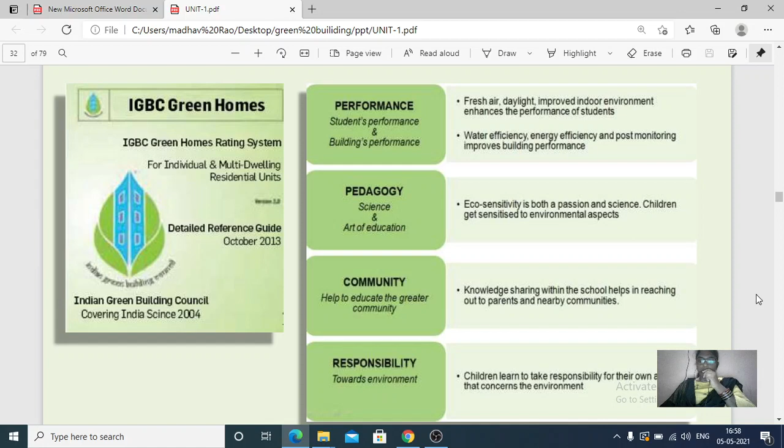Under responsibility, the children learn to take responsibility for their own actions that concern the environment.

Next one is TERI. I told you just now that under TERI you will be getting the Griha certification. Griha certification's full form is Green Rating for Integrated Habitat Assessment.

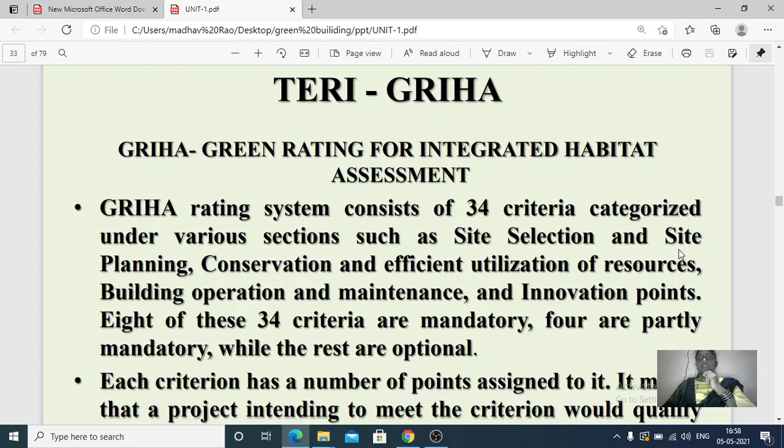Griha rating system consists of 34 criteria categorized under various sections such as site selection and site planning, conservation and efficient utilization of resources, building operation and maintenance, and innovation points. 8 of these 34 criteria are mandatory, 4 are partly mandatory, while the rest are optional.

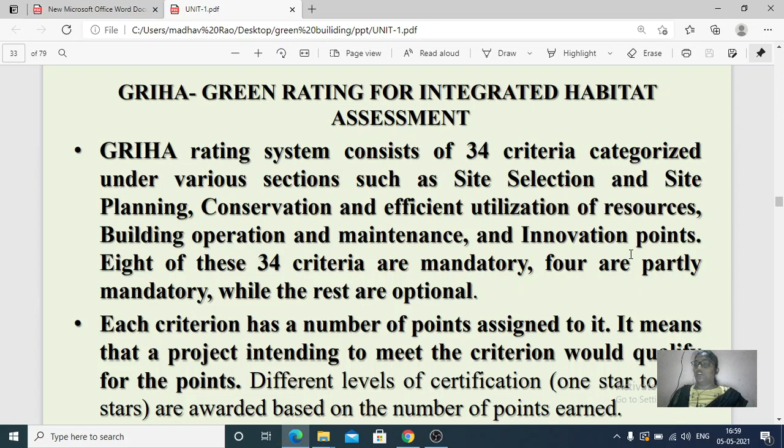When we are constructing a conventional building, we follow codes like IS 456. When we go for steel construction, we follow IS 800:2000, IS 800:2007. Similarly, for constructing green buildings we have to follow certification courses like IGBC conditions.

Under that you will be having certification courses like Griha certification, which has 34 criteria. The main 8 criteria are mandatory and should be followed whenever you are going for constructing a green building.

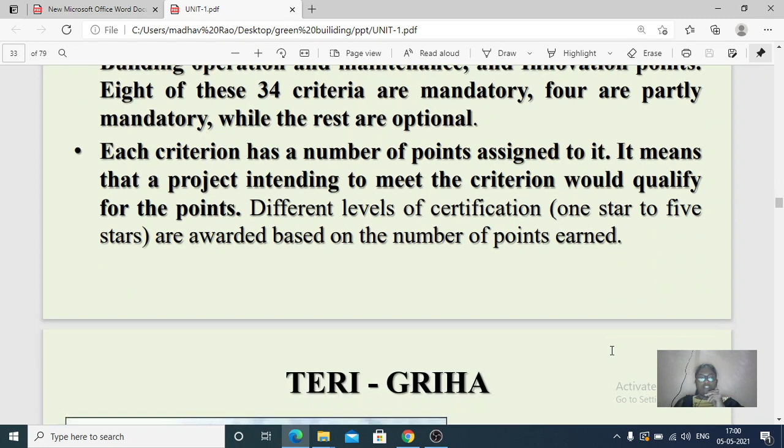Each criteria has a number of points assigned to it. It means that a project intending to meet the criteria would qualify for the points. The different levels of certification, 1 star to 5 stars, are awarded based on the number of points earned.

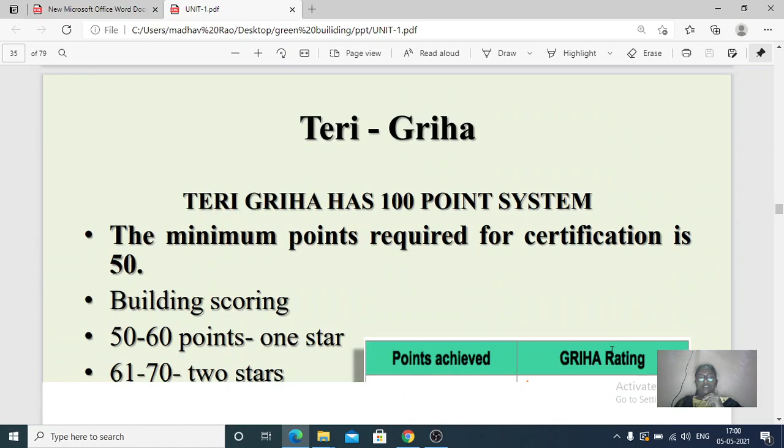The Green Rating for Integrated Habitat Assessment, Griha, is the national rating system for green buildings. TERI has a 100-point system, and the minimum points required for certification is 50, based on the building score.

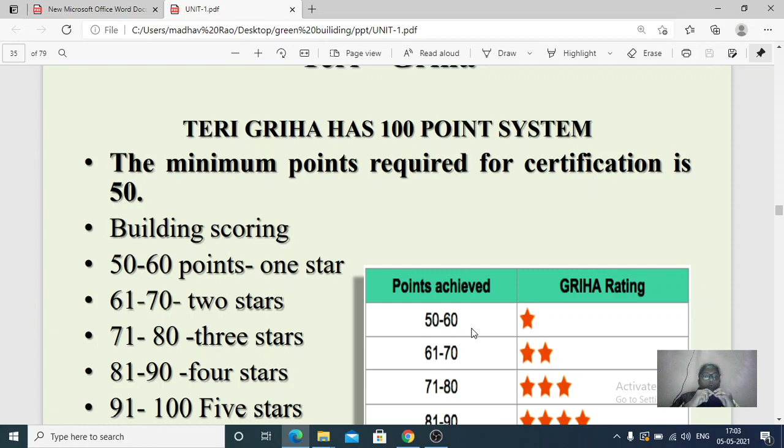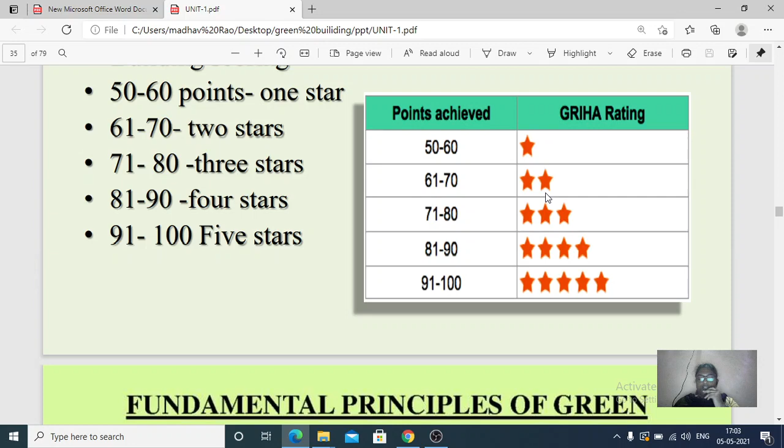A building scoring 50 to 60 will be having a 1 star. 61 to 70 you will be having 2 stars, like that, up to 91 to 100 where you will be having 5 stars.

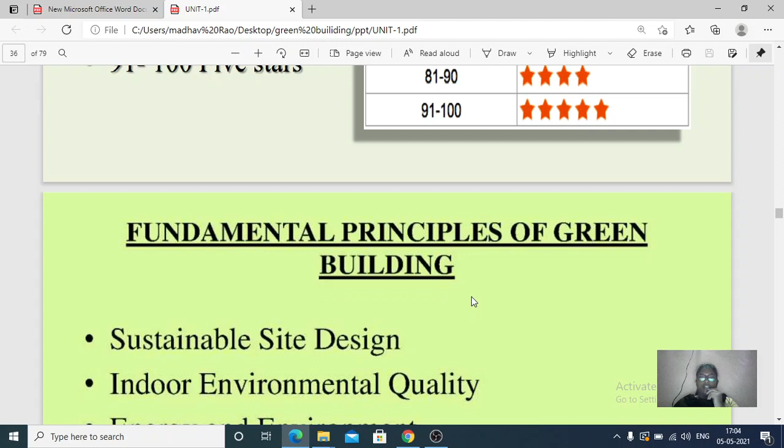Whenever you construct a green building, Griha will be giving you the certification. Fundamental principles of green buildings are sustainable site design, indoor environmental quality, energy and environment, materials and resources, water quality and conservation.

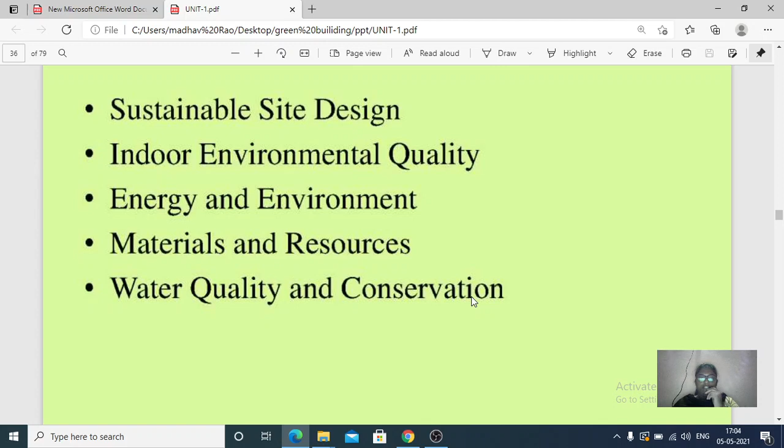So, site selection and planning - what is site selection and planning? In sustainable site design, even when you are going for a conventional building, first you will be doing the preliminary survey following all steps, then a detailed survey, and after that you will be preparing a plan.

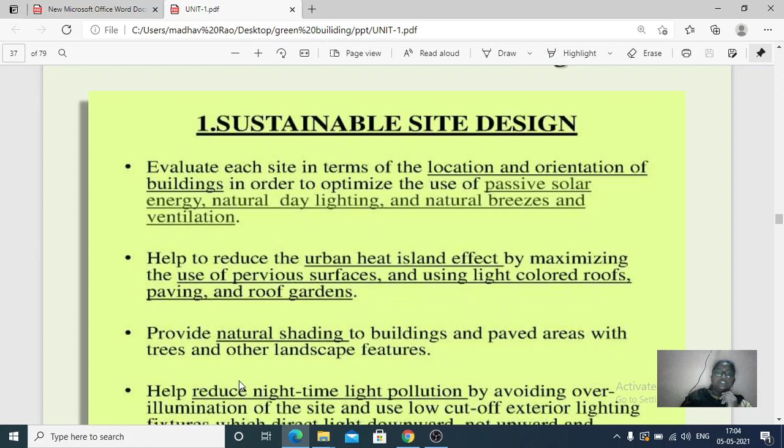Evaluate each site in terms of location and orientation of buildings in order to optimize the use of passive solar energy, natural daylighting and natural breezes and ventilation.

Here I will show you some 18 examples from all over the world for green buildings. By seeing these you will get an idea - 18 examples of sustainable architecture around the world.

See here, this is also a green building known as the first green building, the Pixel Building, Melbourne, Australia.

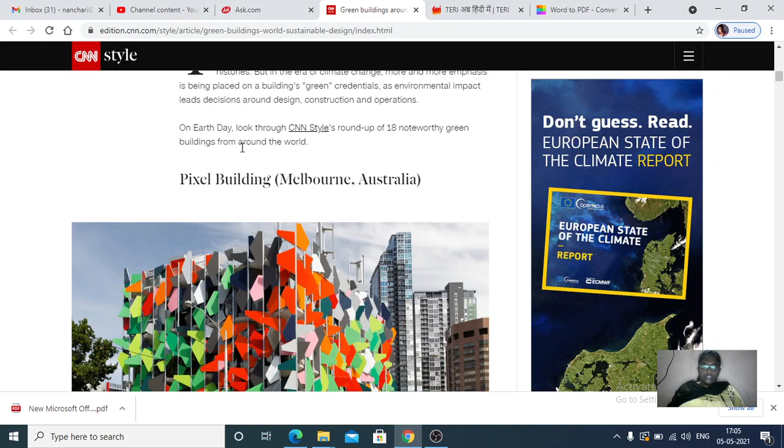On Earth Day, we look through CNN style and round up 18 noteworthy green buildings from around the world. Here is the first one, can you people see it clearly?

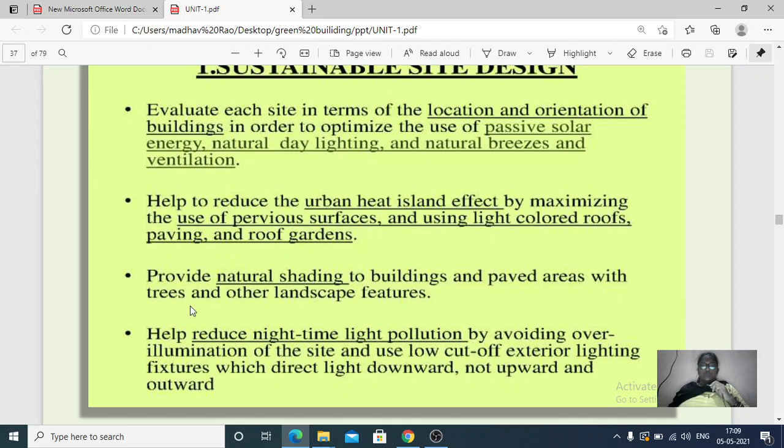When we construct residential buildings, that site may not be most suitable for this. Next, under site selection and planning, you will have: site selection is environmentally responsible, building orientation is optimized.

Building orientation is nothing but considering how the sunrise, the sun rays, whatever light emitted from the sun, can be used.

Next, impervious surfaces are minimized. This means considering how irrigation can be done - how water can be utilized and used for gardening purposes, like that.

Site disturbance is minimized, meaning we will have a cool environment. Storm water quantity and quality is considered. Next is landscaping that is water efficient and active.

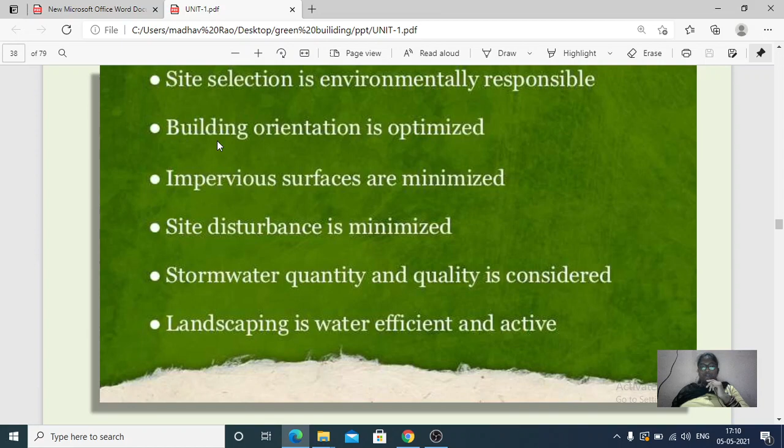Next is indoor environmental quality. Here you will be using building materials, adhesives, sealants, finishes - for example, paints that include chemicals, so we need to avoid that and use water-based ones only.

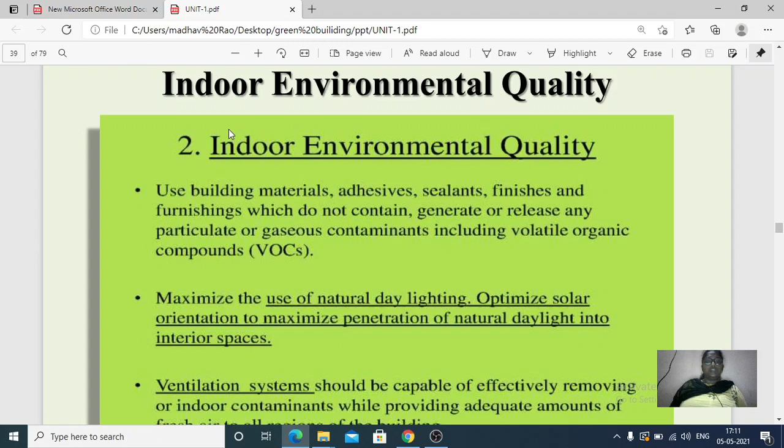Next is maximizing the use of natural daylighting - optimize solar orientation to maximize penetration of natural daylight. In China you can see eco buildings constructed on a mountain.

You can search Google for eco buildings - they completely use natural resources. To my surprise, there is one school constructed on a mountain that people run as a school, completely using natural sources, and the name of that is eco buildings.

Kindly check that one on Google. Maximize the use of natural daylighting, optimize solar orientation to maximize penetration of natural daylight into interior spaces.

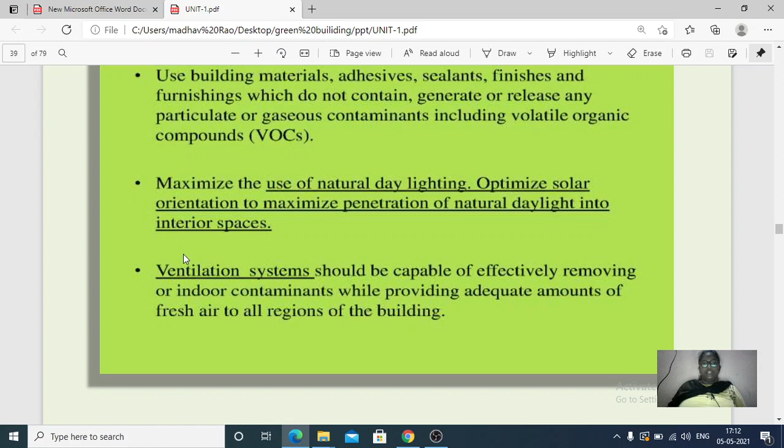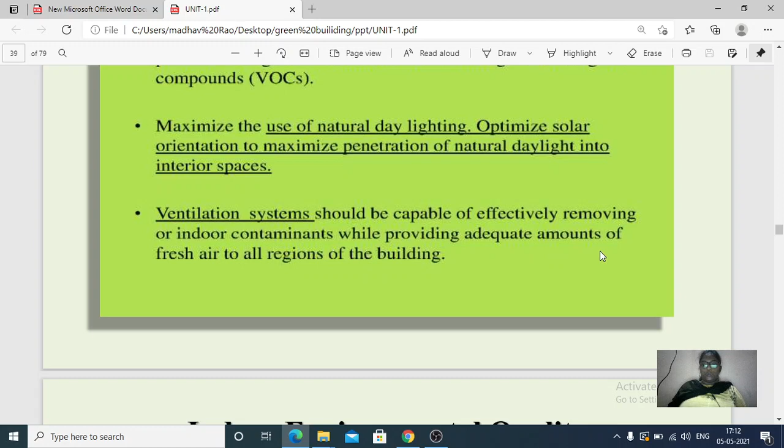Next, the ventilation system should be capable of effectively removing indoor contaminants while providing adequate fresh air to all regions of the building. Next is indoor environmental quality.

Indoor environmental quality: low emitting paints, sealants and adhesives used, zero or low volatile organic compounds, no smoking including restaurants before it becomes non-smoking, increased ventilation 30% above ASHRAE 62.

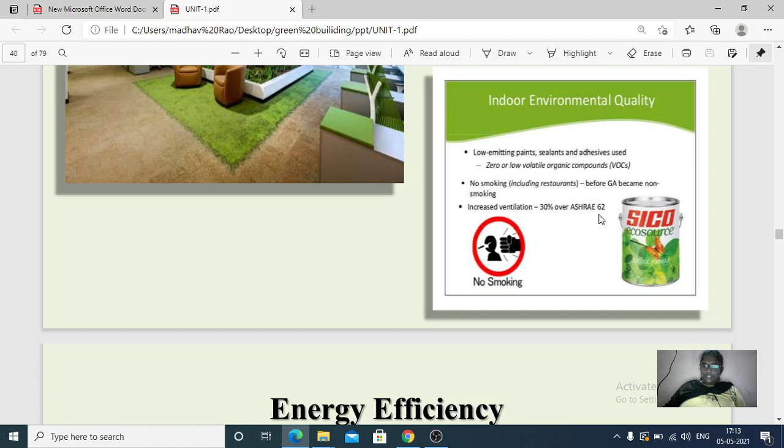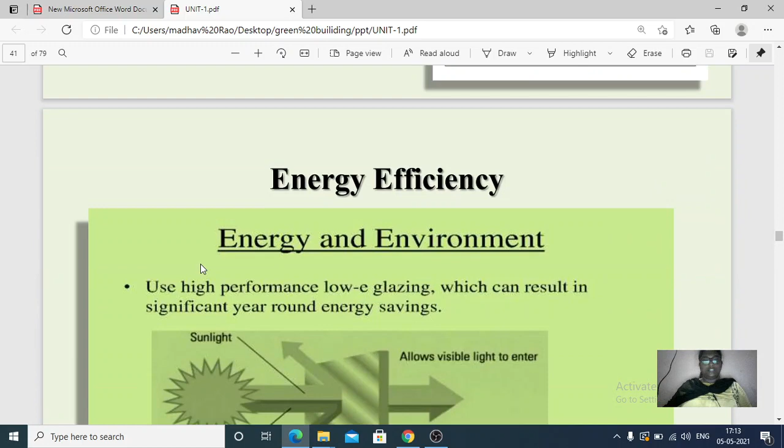Here you people can see a very aesthetic look, a very good appearance, sober look, that can be achieved by constructing green buildings. Next is energy efficiency.

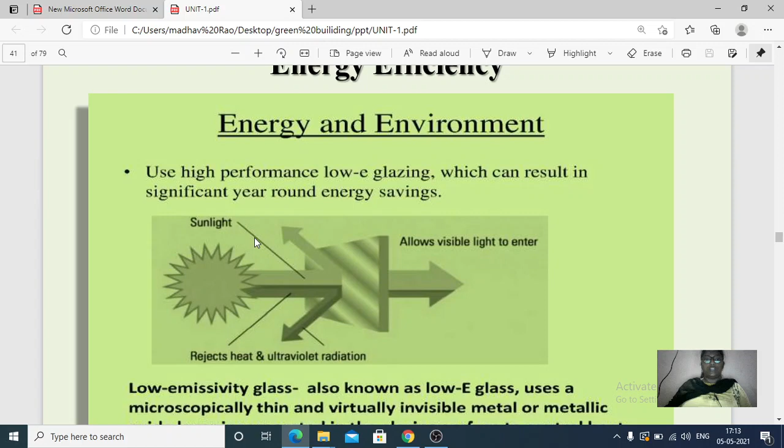Energy efficiency - how are we using it here? Use high performance low-E glazing which can result in significant year round energy savings. Here you people can see, from the sunlight, allow visible light to enter.

Here the building orientation comes into the picture. We have to construct the building where light should be allowed - we should construct the building like that so the sunlight we naturally get can be utilized.

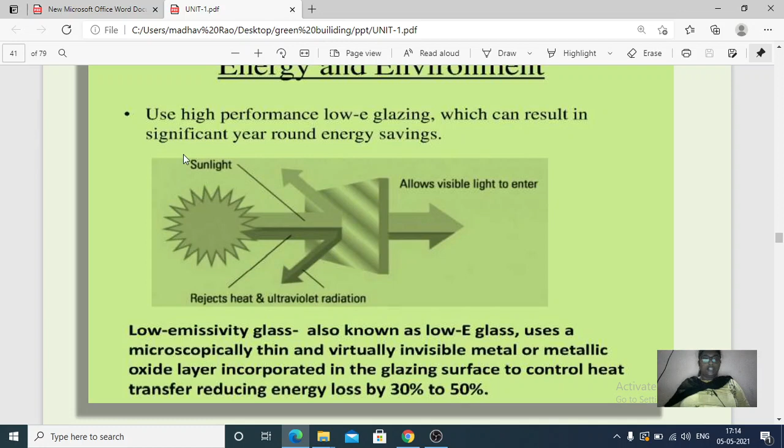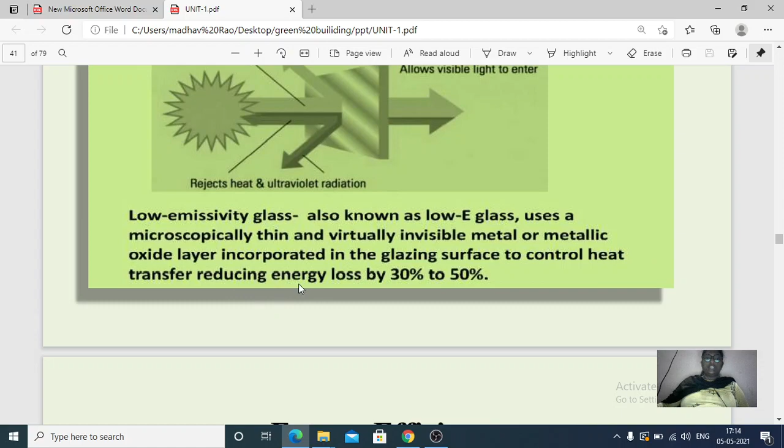Low emissivity glasses, also known as low-E glasses, use a microscopically thin and virtually invisible metal or metallic oxide layer incorporated in the glazing surfaces to control heat transfer, reducing energy loss by 30% to 50%.

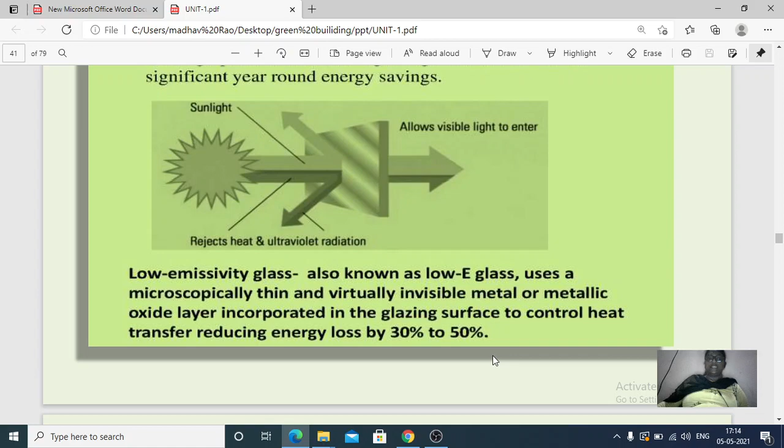See here, if we construct like this using the low-E glasses, you can see it is not completely transparent and not completely invisible. The light can enter easily. So by this, usage of lights in the daytime can be reduced.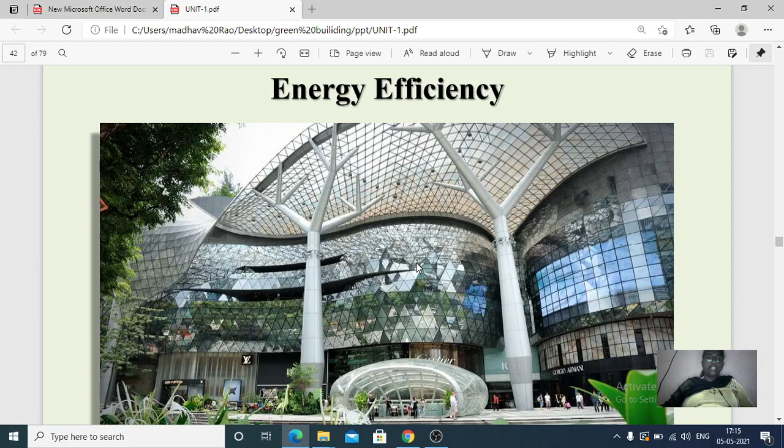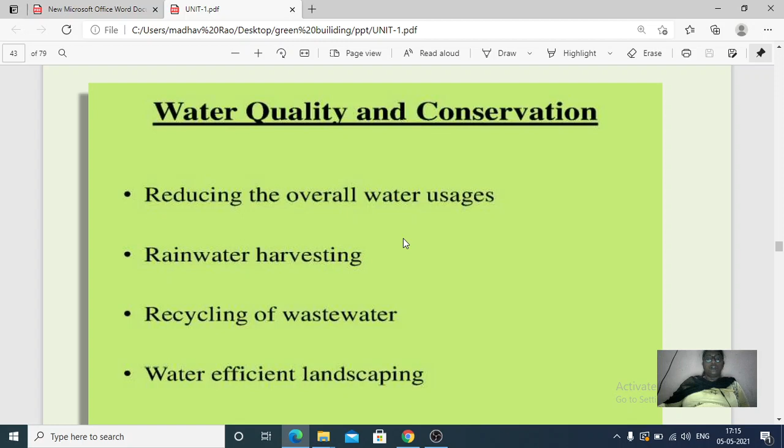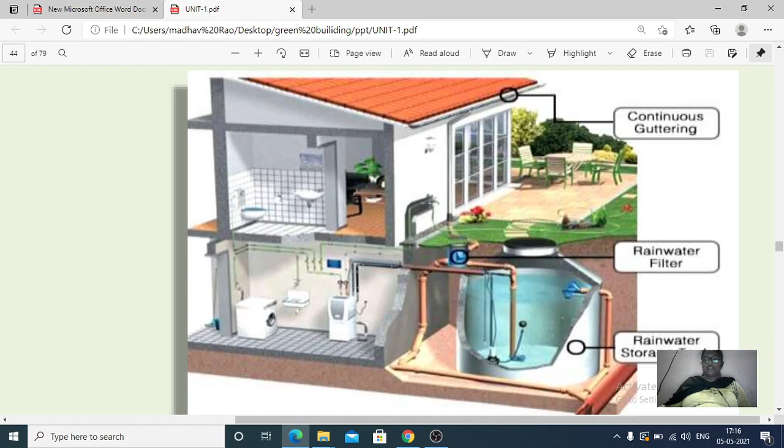Next is water efficiency, like water quality and conservation, reducing overall water usage through rainwater harvesting, recycling of wastewater, and water efficient landscaping. Here you have grey water purification by artificial wetlands and automatic irrigation. See here, continuous guttering means whatever water you get will be dropping by this slope, and there you have a rainwater filter, with a rainwater storage tank. That is the benefit of green buildings.

The next one is innovation and design process. In that you have material and resource management: minimize the use of non-renewable construction material, maximize the use of recycled material, and use modern efficient engineered materials and sustainably managed bio-based materials.

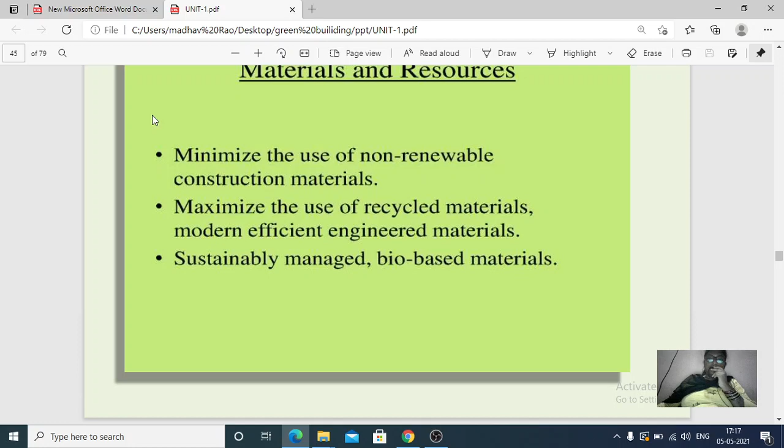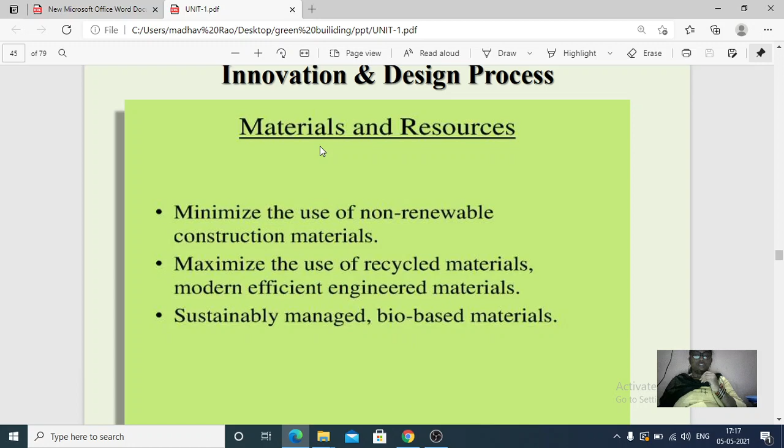For constructing green buildings, we need to use low cost construction materials like wood, avoiding the use of toxic materials and chemical mixed materials. We need to use recycled materials and modern efficient engineered materials.

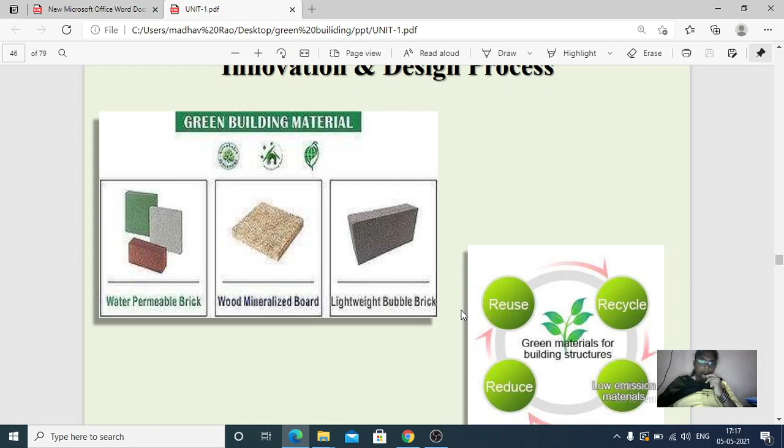Here you can see green building materials: water permeable brick, wood mineralized board, lightweight bubble brick. Whatever material you are using should be reduced, recycled, reused, and low emission material.

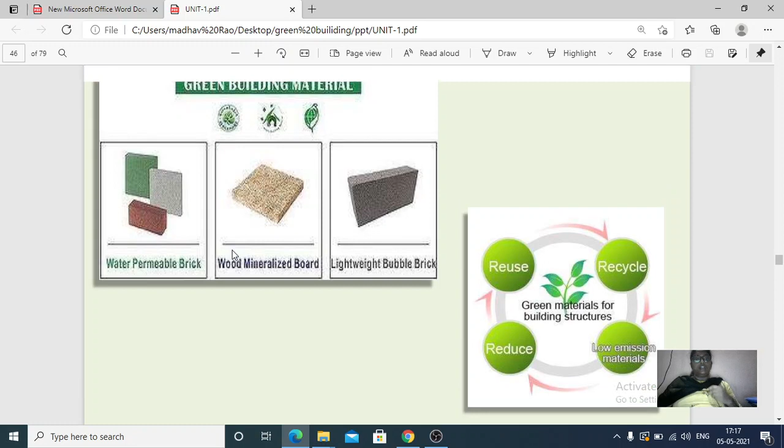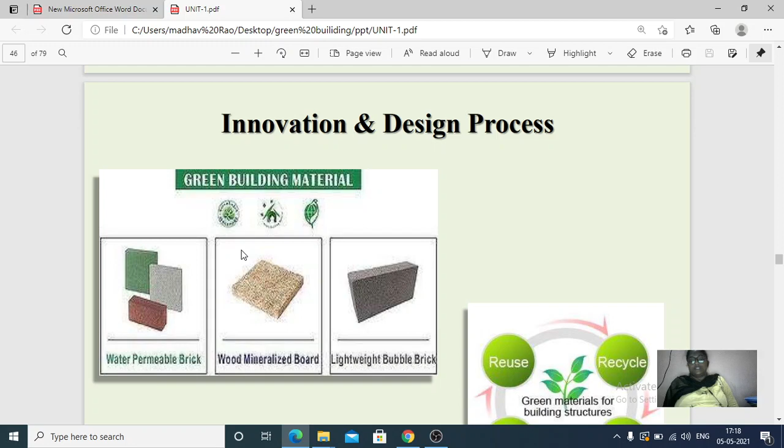In our conventional materials, most of what you use cannot be recycled. Once used, it cannot be recycled, and most materials go into waste whenever you dismantle or demolish the structure. At that moment, most materials will not be considered for reuse or recycle, so if we want to construct again, the cost of construction will increase. Instead, whatever green building materials you use can be reused and recycled.

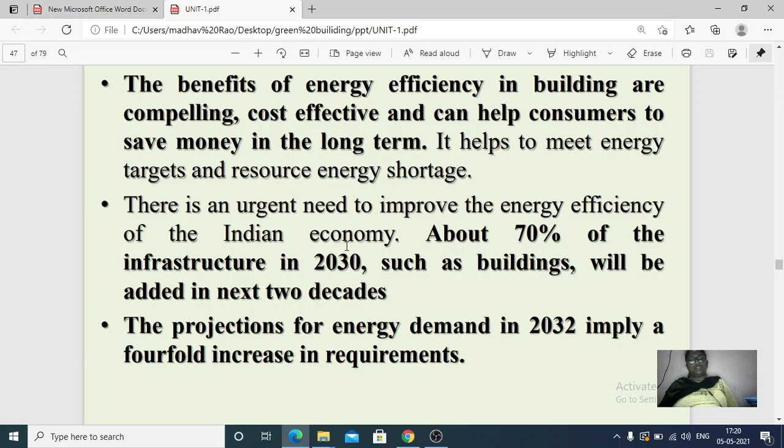Energy efficiency in Indian buildings: nowadays worldwide, everyone is preferring green buildings for low energy use, because mostly industrial buildings and companies are trying to implement this concept in India for low energy usage. The benefits of energy efficiency in buildings are compelling, cost effective, and can help consumers save money in the long term. It helps meet energy targets and resource energy shortage. There is an urgent need to improve the energy efficiency of the Indian economy. About 70% of infrastructure in 2030, such as buildings, will be added in the next two decades. The projection for energy demand in 2032 implies a four-fold increase in requirement.

Green building in India: Suzlon Energy Limited, SEL, in Pune. Just now we saw the picture on Google, I already showed you that one. Suzlon Energy Limited SEL, India's largest wind turbine manufacturer, received the LEED Platinum Award for their new corporate headquarters in Pune, Maharashtra, India.

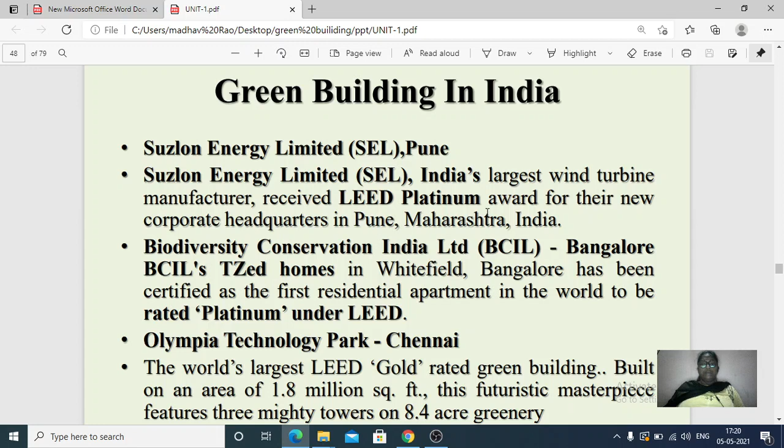Biodiversity Conservation India Limited, BCIL Bangalore - TZed Homes in Whitefield, Bangalore, has been certified as the first residential apartment in the world rated platinum under LEED. Olympia Technology Park, Chennai, is the world's largest LEED Gold rated green building, built on an area of 1.8 million square feet. This futuristic masterpiece features three mighty towers on 8.4 acres of greenery.

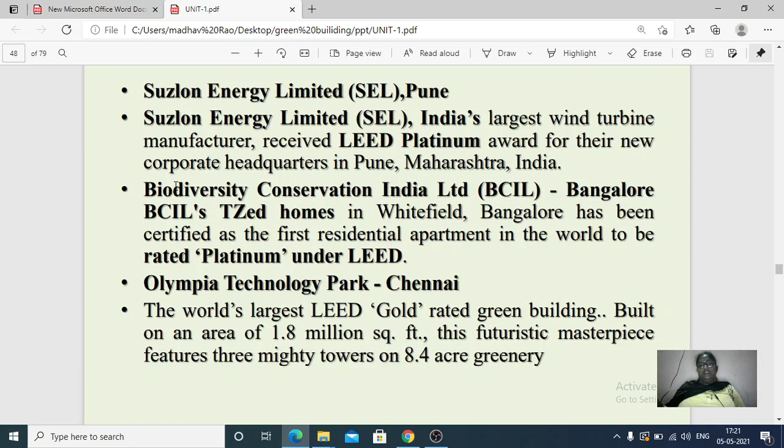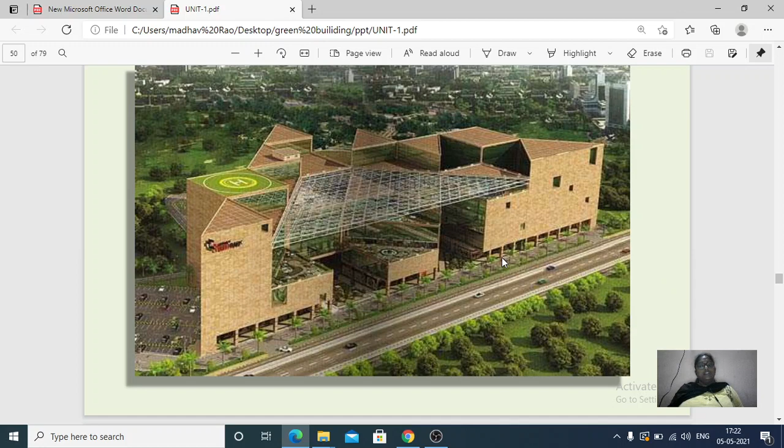In India, many green buildings are there, but these three buildings are under certification. Here you can see Suzlon Energy Limited, SEL Pune, LEED Platinum, clearly. Biodiversity Conservation India Limited, BCIL Bangalore, LEED Platinum - let's see here, you can see the complete green building, how neatly and soberly the building is looking. Olympia Technology Park, Chennai, LEED Gold certification under Griha, with a 5-star rating with all amenities and natural resources.

Green buildings in India: ITC Green Center, Gurgaon. The ITC Green Center was the first platinum rated building in India and has endeavored to adopt green practices that go beyond recycled waste and day-lit offices. The Druk White Lotus School, Ladakh.

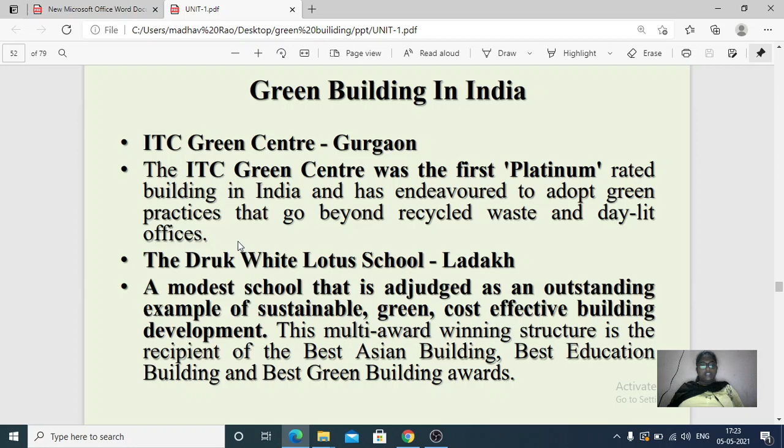A modest school that is adjudged as an outstanding example of sustainable green cost effective building development. The multi award winning structure is the recipient of the Best Asian Building, the Best Education Building, and the Best Green Building Awards.

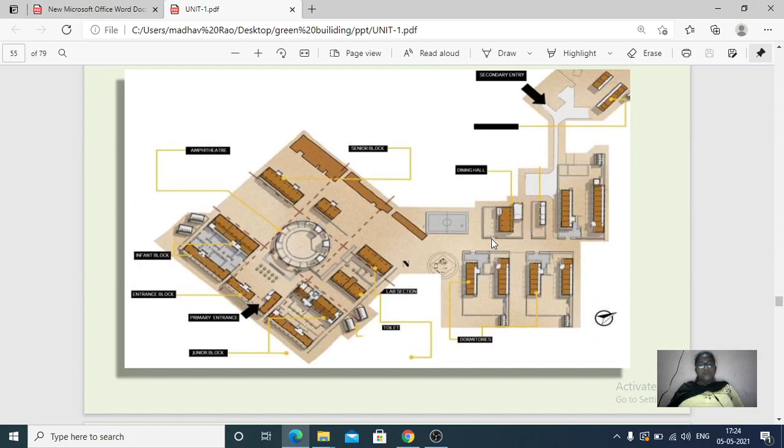The Druk White Lotus School Ladakh received the Best Green Building Award. Here you can see they are using complete solar panels. The layout of the building is also shown here.

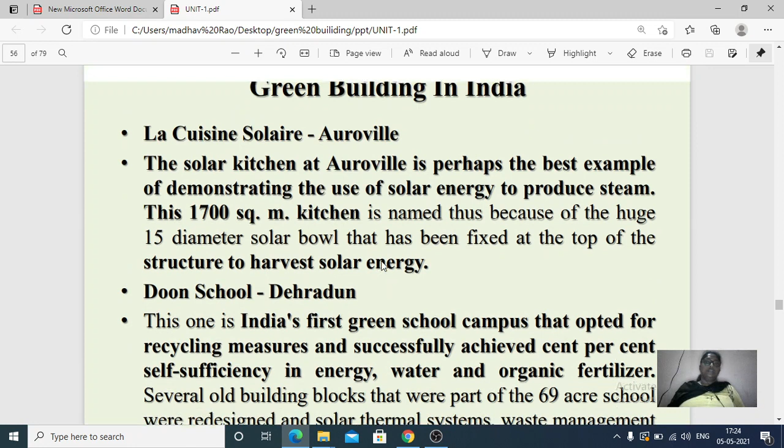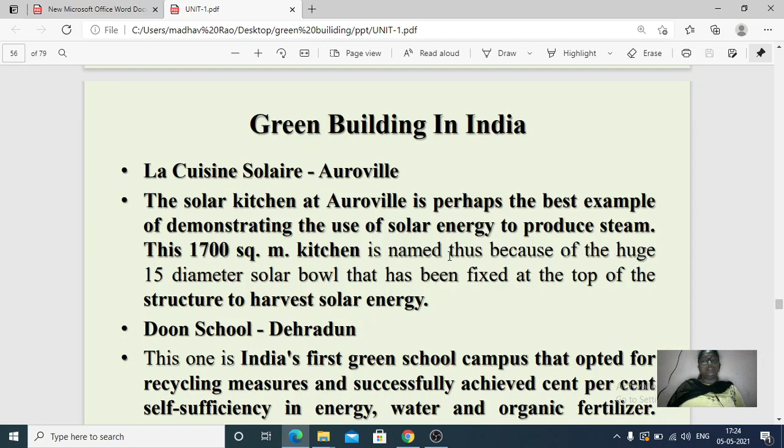Green buildings in India: La Cuisine Solaire, Auroville. The solar kitchen at Auroville is perhaps the best example demonstrating the usage of solar energy to produce steam. This 1700 square meter kitchen is named thus because of the huge 15 diameter solar bowl fixed at the top of the structure to harvest solar energy.

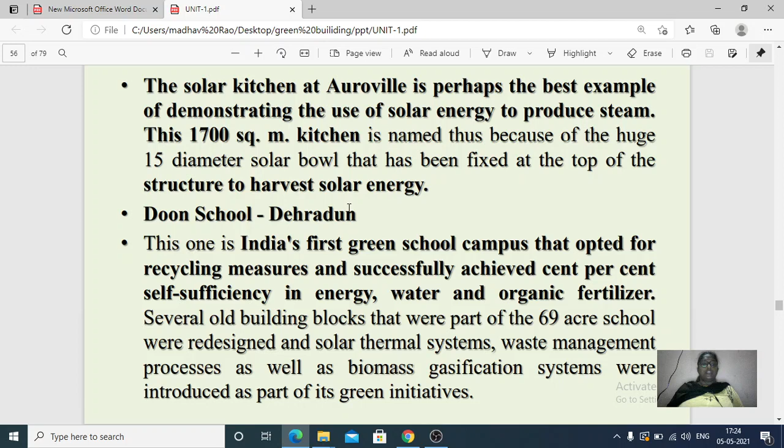Doon School, Dehradun. This is India's first green school campus that opted for recycling measures and successfully achieved 100% self-sufficiency in energy, water and organic fertilizers. Several old building blocks that were part of the 69 acre school were redesigned, and solar thermal systems, waste management processes, as well as biomass gasification systems were introduced as part of its green initiative.

Here you can see La Cuisine Solaire, Auroville's 1700 square meter solar kitchen. And here, Doon School, Dehradun, India's first green school campus.

So right, this type of building will be very useful for the future, where a healthy environment will be provided to the students. Very good looking one.

Right, here you can see this one, Auroville. Here what they are using is the kitchen provided under the 1700 square meter space, named the solar kitchen. The kitchen which they are running uses solar panels through which energy is generated.

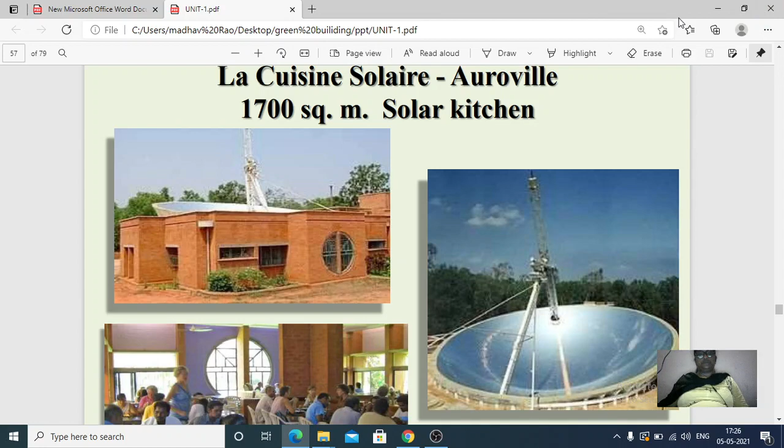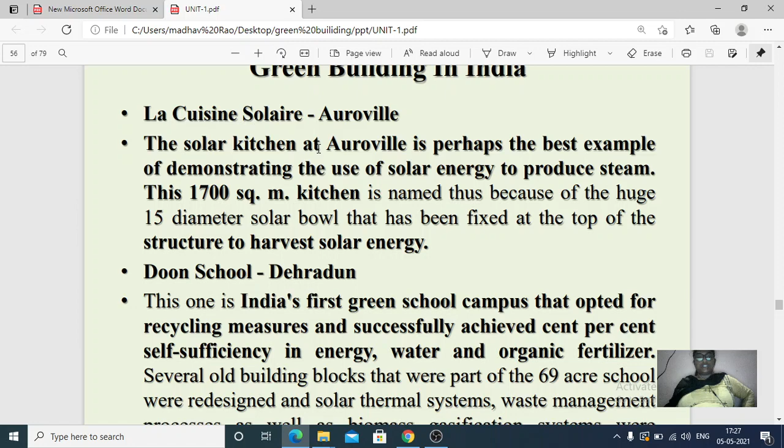Here what they have told is, the solar kitchen at Auroville is perhaps the best example for demonstrating the use of solar energy to produce steam. This 1700 square meter kitchen is named thus because of the huge 15 diameter solar bowl fixed at the top of the structure to harvest the solar energy.

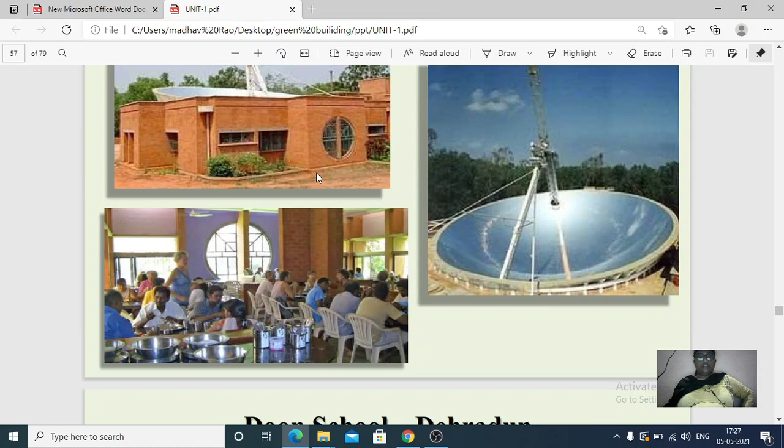See here, you people can see it clearly. Here also you can see how large it is. Right, next one, Doon School, Dehradun.

This one is India's first green school campus that opted for recycling measures and successfully achieved 100% self-sufficiency in energy, water and organic fertilizers.

This is the best example which we can show students in real life, how recycling measures can be taken, how energy can be utilized, how less energy can be used, and how water can be used very sparingly, and how organic fertilizer can be made. Nowadays many people are very interested to go for organic material where chemicals should not be used more.

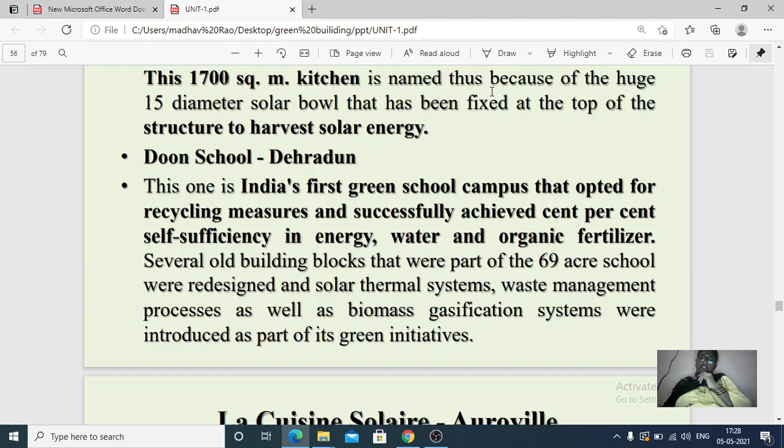Several old building blocks that were part of the 69 acre school were redesigned, and solar thermal systems, waste management processes, as well as biomass gasification systems were introduced as part of its green initiative. Here you can see it clearly.

If this type of school were constructed in Telangana... In Telangana we only have companies using these green buildings, we don't have this type of school. If you know, please let me know by checking this in Telangana if we have any green buildings. We have green buildings you can see at Orbit Mall, that place, used as companies, software companies, but I don't know regarding schools, please let me know.

Today we have studied regarding energy efficiency, and we have studied about GRIHA also. Green buildings in India, many green buildings are there. We will study in the next class.